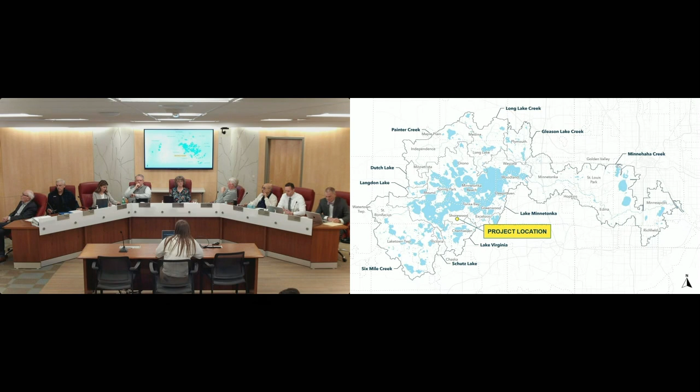The applicant is proposing the project in the city of Shorewood, located in the Lake Minnetonka subwatershed, as shown here in yellow.

Zooming in further, you can see the project location, again shown in yellow, drains northwest via Pebble Creek into a wetland complex before ultimately draining into Lake Minnetonka.

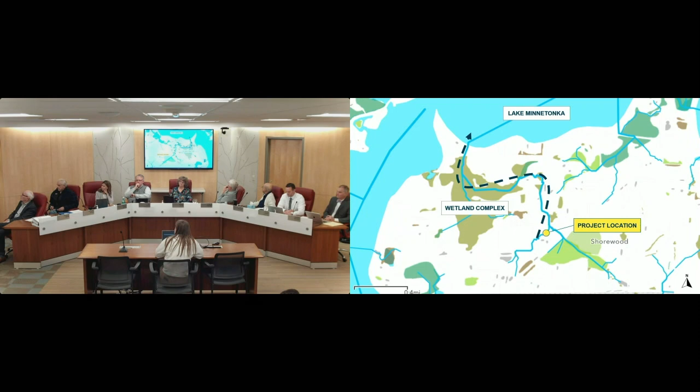The site is shown here, outlined in orange, with Pebble Creek shown in blue. The site has 1 existing home, and the city of Shorewood approved a 2-lot split for the site in October of 2024, so the site is now divided into 2 parcels, as shown here. The proposed work is occurring on the highlighted orange parcel.

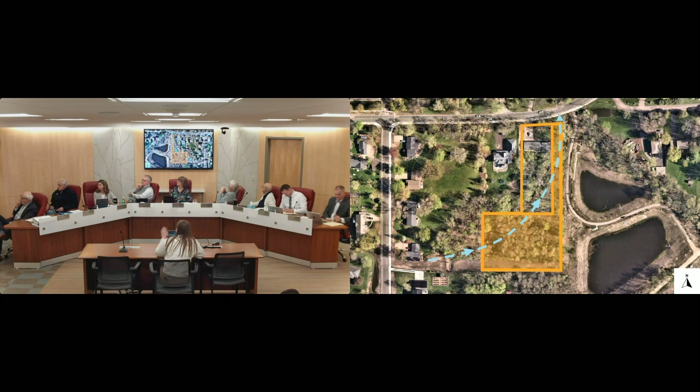The current project proposed is the installation of a driveway and utilities such as water, sanitary sewer, phone, cable, gas, and electric lines. These are proposed to service a future single-family home that is not proposed at this time and will be subject to future permitting.

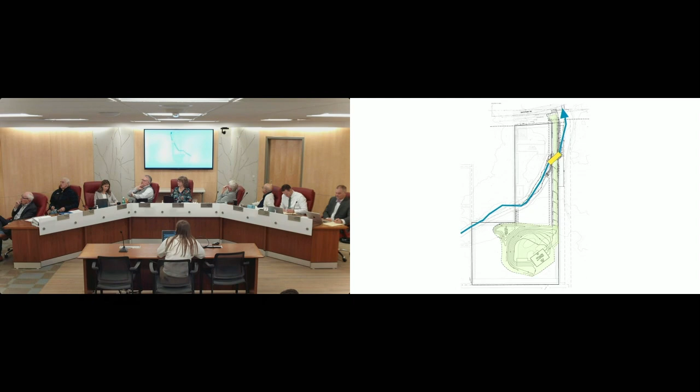In order to construct the driveway crossing, a series of culverts are proposed at the point where the driveway crosses Pebble Creek. Even though the future home isn't proposed at this time, grading is proposed in the area to prepare the site for the future build.

Because this is a 1 to 2 lot subdivision and the proposed impervious surface amount for the driveway and future single-family home is under 1 acre of new and reconstructed impervious surface, the stormwater management rule is not applicable. That being said, the applicant is proposing a filtration basin to conform to the city's stormwater regulations, which will be constructed at the time of the future house.

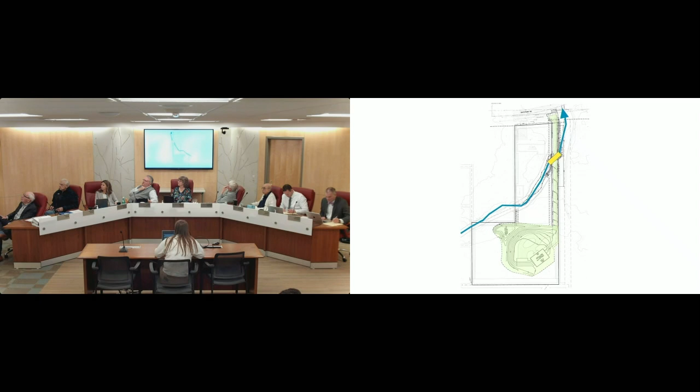I'll now pivot to the analysis for how the proposed project meets district rule requirements.

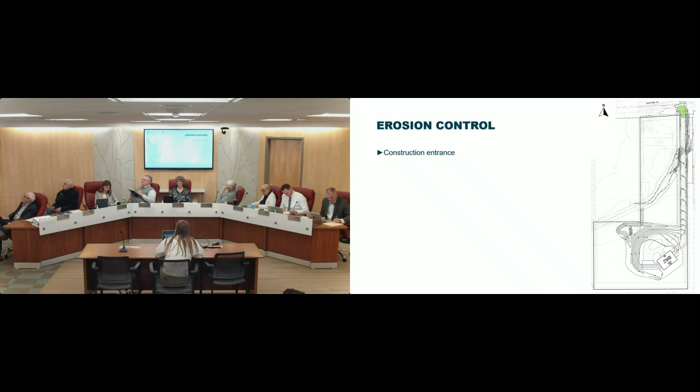Because the project disturbs more than 5,000 square feet of land and will be moving more than 50 cubic yards of soil, the erosion control rule is triggered. The applicant's erosion control plan proposes a construction entrance at the north side of the site, outlined here in green, with perimeter control around the entire site and between the proposed grading and the creek. The applicant also proposes a temporary ditch check downstream of the proposed culvert to reduce sedimentation downstream. Staff have reviewed the applicant's erosion control plan and found it compliant with all rule requirements.

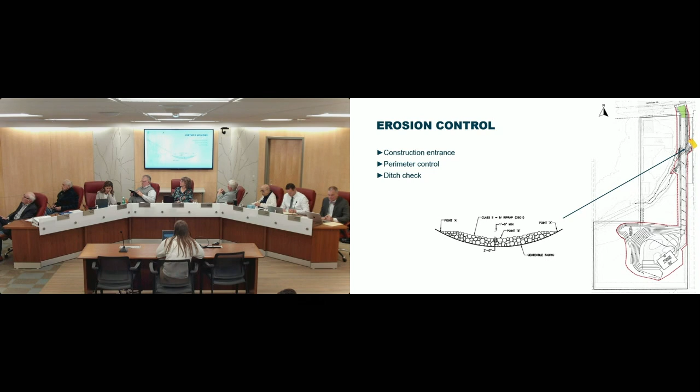This project triggers the water body crossings and structure rule for 2 parts of the project. The first is the proposed culverts associated with the driveway crossing, and also the subsurface crossing of the creek for the utility lines. The rule states that the use of the bed or bank of a water body must meet a demonstrated specific need. In this case, the demonstrated need is to provide vehicular and utility access to the proposed house.

I'll first go over the analysis for the proposed culverts and then the utility crossing. The rule requires that hydraulic capacity be maintained, and for watercourses specifically, there may be no increase in upstream or downstream flood stage. The district engineer has reviewed the applicant's modeling for the proposed culverts and found that there's no increase in flood stage, therefore meeting this section of the rule.

The project is also required to maintain navigational capacity. As shown earlier, Pebble Creek is an intermittent stream with low flows that are not capable of navigation in neither the existing nor the proposed conditions.

The project must also preserve aquatic and upland wildlife passage. The proposed culverts are 2 feet wide, and their size and elevation maintain passage of wildlife within the creek. The proposed driveway will also not prohibit passage of deer or any other wildlife that would cross in the area.

The flows passing through the creek are relatively low, but the applicant also proposes riprap at the outfall of the culverts to prevent erosion or scour. The rule requires that the proposal be the minimal impact solution to the project's need. The applicant has also provided 4 alternatives demonstrating that their proposal is the minimal impact solution.

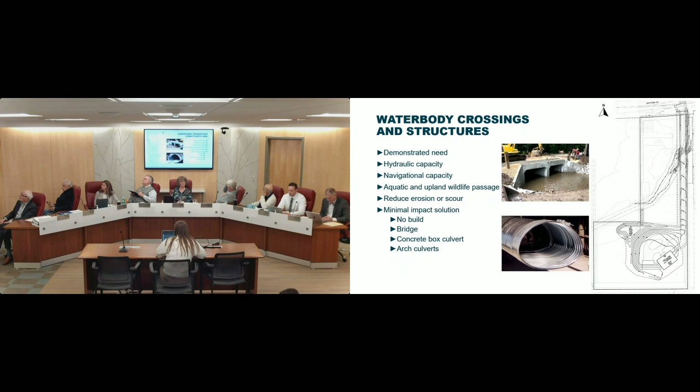However, some other alternatives that were considered were larger crossings like a bridge, box culvert, or larger arch pipes, but those have more inherent impact being larger crossings and affect other factors like constructability.

Now pivoting to the analysis of the proposed utility lines, the proposed lines cross below Pebble Creek and therefore were analyzed using the subsurface crossing criteria. This criteria requires that the crossings have a minimum clearance of 3 feet below the bed of the water body and that entry and exit boreholes be placed at least 100 feet away from the water body bank. The water and sanitary sewer is proposed to be constructed with the driveway installation and meet this criteria.

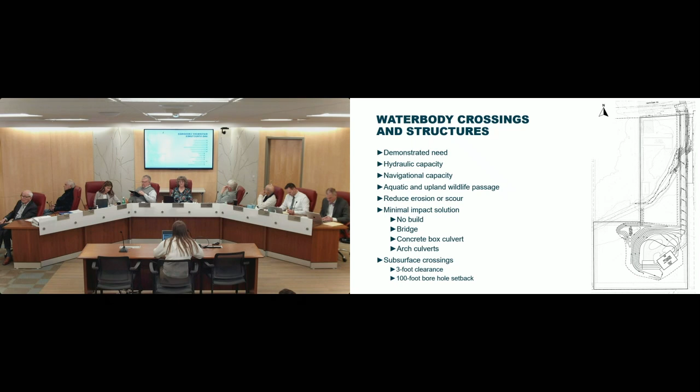The additional utilities will be installed at the same time as the future home construction so that they can tie into the service site. Therefore, it's recommended that a condition of the permit be to provide updated crossing plans if plans do change due to final home layout.

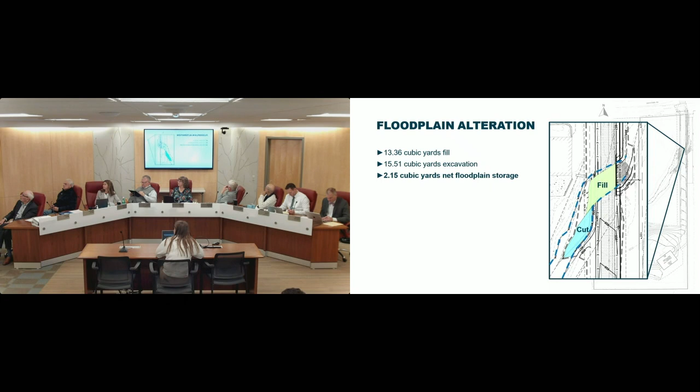The installation of the culverts requires fill within the floodplain of Pebble Creek, and therefore the floodplain alteration rule is applicable. The project proposes 13.36 cubic yards of floodplain fill and 15.51 cubic yards of excavation to offset the proposed fill. This results in 2.15 cubic yards of net floodplain storage created, therefore meeting the rule.

Now that we've gone over the district's rule analysis that are triggered for this proposal, I'll discuss the comments and concerns that were received during the permit's public notice period by 2 nearby property owners. After receiving the comments, district staff met with one of the property owners and Shorewood city engineer to meet on site to discuss the concerns in a bit more detail.

Nearby property owners expressed concern that district policies are to protect wetlands. However, this project isn't being reviewed for wetland impacts. As mentioned earlier, the site drains to a wetland complex before eventually draining to Lake Minnetonka. However, there are no delineated wetlands identified on site, and therefore the wetland protection rule is not applicable. That being said, staff has reviewed the project under the erosion control rule to make sure that best management practices are in place to minimize sedimentation off-site and into downstream water bodies.

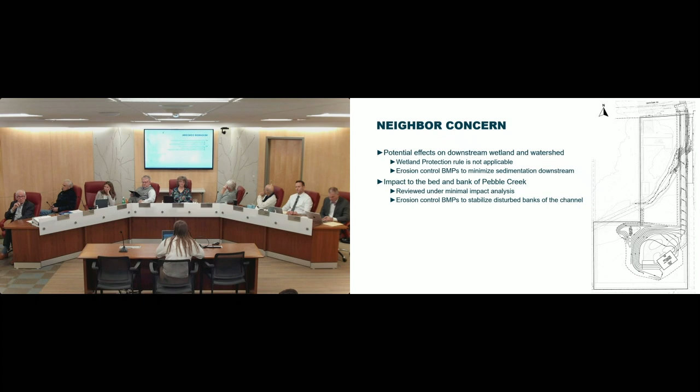Concern was also raised in regard to the impact that the project will have on the bed and bank of Pebble Creek. The installation of the culverts results in some inherent level of disturbance, but the project has been reviewed under the minimal impact analysis for the water body crossings and structures rule. Prohibiting the crossing would mean prohibiting access to the buildable portion of the parcel. The applicant also proposes a temporary ditch check to minimize sedimentation and erosion control blankets and seed mix on the disturbed banks of the channel.

There was also concern raised regarding the impact that the construction will have on wildlife habitat. And while the general project and construction is not regulated by the district on the impact it will have on wildlife, the impact that the proposed crossing will have on wildlife passage was reviewed under the water body crossings and structures rule.

Concerns regarding tree removal were also raised. While the district does not regulate tree removal, the city of Shorewood has a tree ordinance with a replacement requirement that staff understands will be implemented as a part of the city building permit process.

A concern was also raised regarding the proposed grading and increased impervious surface and that it should be regulated. As mentioned earlier, because the new and reconstructed impervious surface for the driveway and future home is less than 1 acre of new and reconstructed impervious surface, and also part of a single-family residential development, it's exempt from the stormwater management rule. However, the applicant is proposing a filtration basin to capture and treat the runoff from the home in accordance with city stormwater regulations.

A central concern of nearby property owners was that the proposed driveway and future home may increase groundwater levels. They have requested that a requirement of the permit be for the applicant to conduct a hydrologic assessment looking at the project's potential impact to groundwater in greater detail.

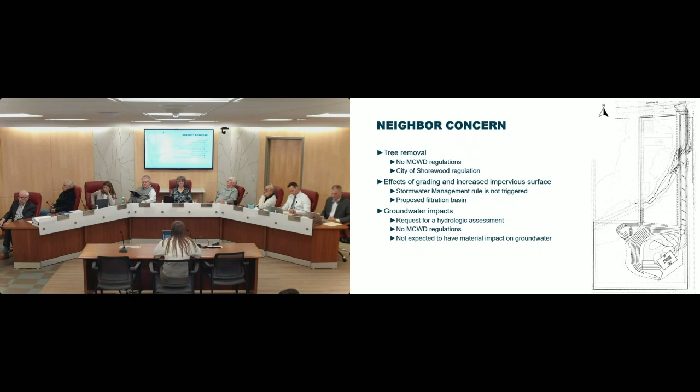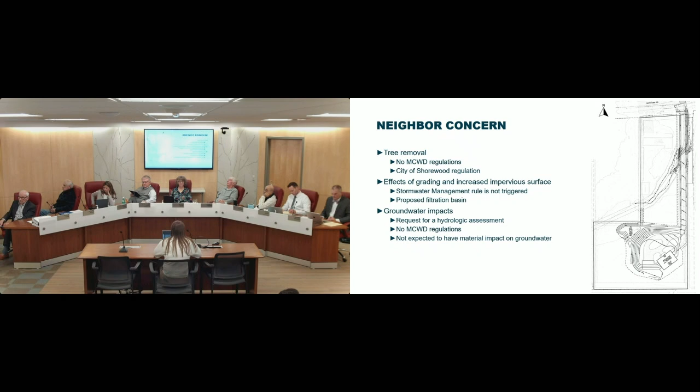Manager Loftus? Just a quick question. The ponds that are just on the other side, are those the ones you can see from the trail? Yes. Yeah, okay. Would there be setbacks? That's not a wetland though, so would there be setbacks from a pond? Yes, thank you, Manager Loftus. That's a good question. All of the wetland impacts and setbacks for the Smithtown Ponds project were regulated as a part of that permit. And for wetland buffers in general, if there is a wetland that's off of the property, the owner is not required to put a buffer around a different

I just wanted to note, we're test driving new AV systems, so we're working out the kinks, appreciating everybody's patience. So if we do have that freeze up again, I think Maggie will just continue the presentation. All right, so it's Murphy's Law, we test drove it 5 times today, didn't have any issues. But now it's prime time. There's a gremlin maybe, huh?

Okay, thank you. Does that help? Okay. Okay. Thank you for bringing it to our attention.

Ms. Mendon. All right. Good evening, President White and managers. I'm presenting permit 25-056 for a single-family home located at 9501 Lakewood Circle. The permit is before the board due to public request from a concerned neighbor. I believe members of the public are in attendance tonight and may wish to address the board.

This permit application is also requesting an exception from our stormwater rule by proposing to get credit for treating 5.87 acres of ag land on the property. Staff and the district engineer are recommending that the board approve this permit and the associated exception. Quick outline, I'll start with a project overview before walking through the district's rule analysis. Then I'll go over the exception request and end with an overview of the concerns.

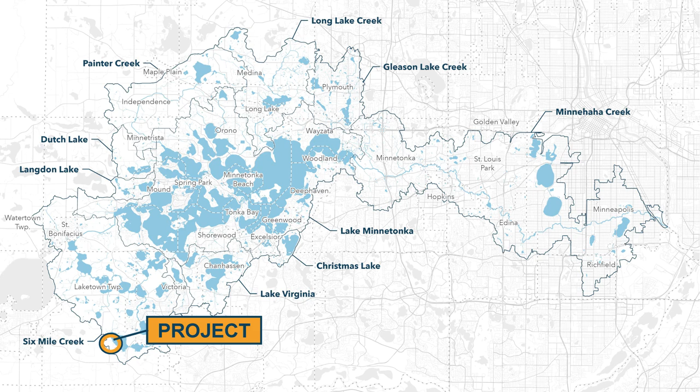9501 Lakewood Circle is located within the 6 Mile Creek Halsted Bay subwatershed and is in Laketown Township. The 61-acre parcel shown in yellow is on the west side of Pierson Lake and falls right on the district's boundary. The site has historically been used for agriculture, and the proposed use will incorporate both agriculture and a residential dwelling.

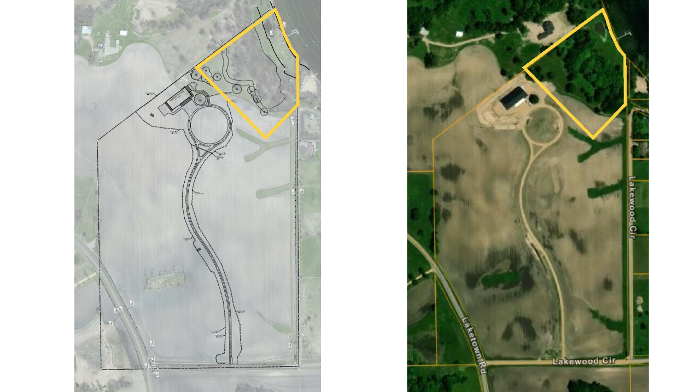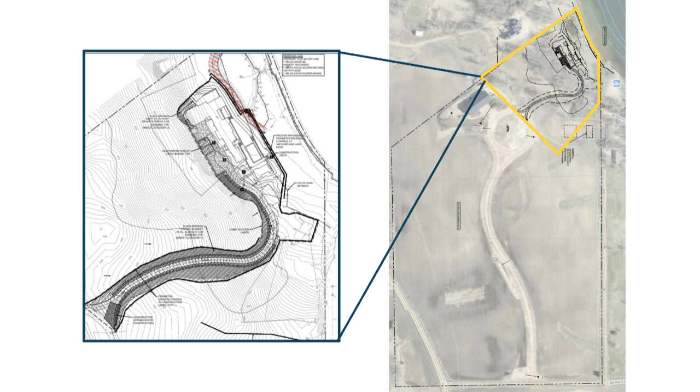In 2023, the applicant applied for a district permit for the construction of a driveway and pole barn, which you see on the screen. This project was reviewed and approved and recently finished construction. The permit we have in front of us tonight is for the construction of a single-family home in the area shown in yellow. The project will involve the construction of a new residential structure and associated driveway, which will result in an additional 0.52 acres of hard cover.

The project proposes to disturb just under 80,000 square feet and excavate over 5,000 cubic yards, so the erosion control rule is applicable. To meet the requirements, the applicant is proposing a construction entrance and perimeter control with a double row of silt fence between the proposed work and the wetland edge. Additional erosion practices are noted in the applicant's SWPPP.

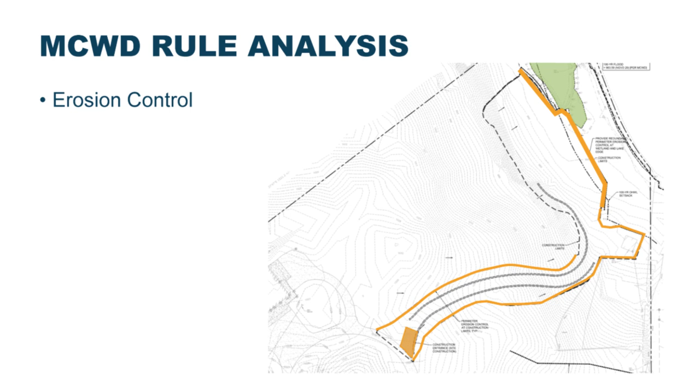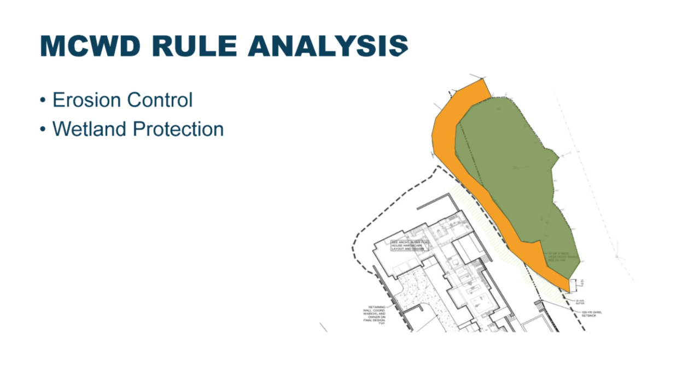On site, there's a managed 2 wetland. The house is proposed upgradient of this wetland and therefore requires a buffer. To meet this rule, the applicant has provided plans that show a 25-foot buffer using buffer averaging, and the buffer is shown in orange.

The picture on the left is looking back on the property from the shoreline and shows the existing conditions and vegetation. The applicant is not proposing to grade or otherwise disturb the existing vegetation within the buffer area, aside from a 10 by 3 foot vegetated swale, which will be stabilized and vegetated in accordance with PCA guidance. This buffer area meets the requirements of this rule and will be recorded under a maintenance declaration.

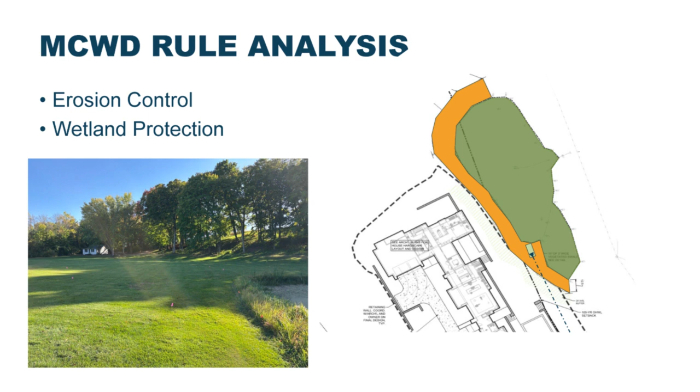All work on this site is considered a common plan of development under our stormwater management rule, which means that we review for the total amount of hard cover on site, not just for the proposed house. So for both projects, the aggregate hard surface is 2.27 acres, which requires volume and rate control. Our rule requires that water quality standards be met by providing volume control.

For volume control, the development in total is required to provide 8,266 cubic feet of volume control for those 2.27 acres of new impervious surface. As part of phase 1 of this project, 4 basins were constructed, and those basins provide 13,323 cubic feet of volume control.

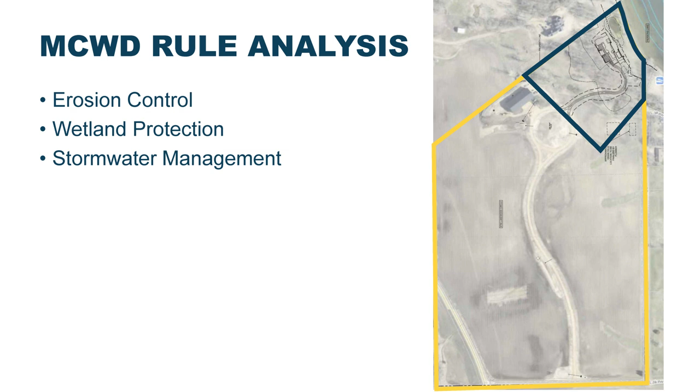For the house, it's been demonstrated that due to high groundwater and poor soils, a basin that captures and infiltrates the house runoff is technically infeasible. The applicant is requesting to utilize the existing basins, which are oversized and treat a greater area, to meet the water quality requirements, which brings us to the exception request.

Under strict compliance, the applicant would provide 1,901 cubic feet of volume control to capture and treat runoff from the 0.52 acres of new impervious surface from the house. The amount of phosphorus removal provided by this volume control would be 1.68 pounds per year.

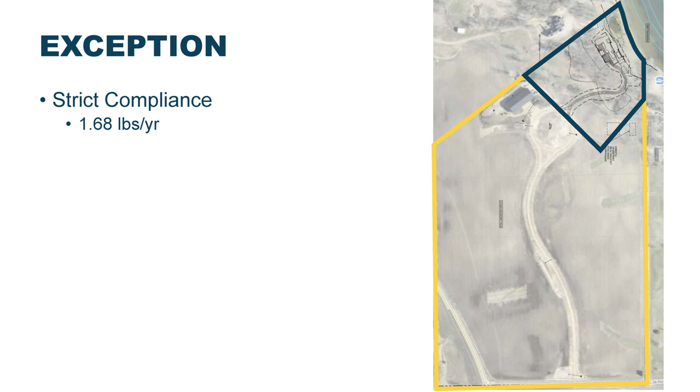The applicant is requesting that the board consider the existing basins, which are oversized, treat a larger area, and capture ag land to meet water quality requirements for the site. 3 of the 4 basins capture 14.1 pounds of phosphorus that would otherwise flow into Pearsons Lake.

The 4th basin captures 7.8 pounds of total phosphorus per year that would otherwise drain to a low point on the parcel. So in total, the proposal removes more than 10 times the required amount of phosphorus within the 6 Mile Creek subwatershed, which leads staff and the district engineer to recommend approval of the proposed exception.

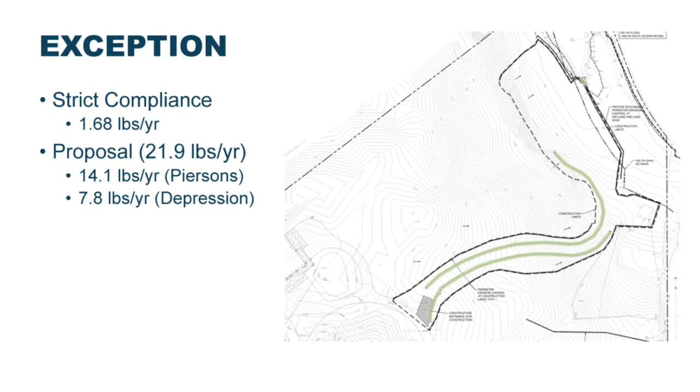Transitioning to the neighbors' concerns, during the permit public notice period, the district received inquiries from a neighbor, Mr. Klingelhutz, who is the president of the Piersons Lake Association. As we commonly do when there's public interest in a permit, staff engaged with the neighbor and exchanged multiple emails and phone calls over the past few weeks.

In the next few slides, I'll go over the concerns and the district's conclusions. I'll note that the applicant, Mr. Young, offered to have a meeting to discuss any of these concerns and relayed that to the concerned neighbors, but it was not something that was pursued.

The question was asked, does the district routinely allow construction limits right up to the open water within wetland buffer areas on large properties? The answer is yes. The district regulates impacts to wetlands themselves and requires buffer areas to be vegetated. This allows for buffer disturbance as long as it's revegetated.

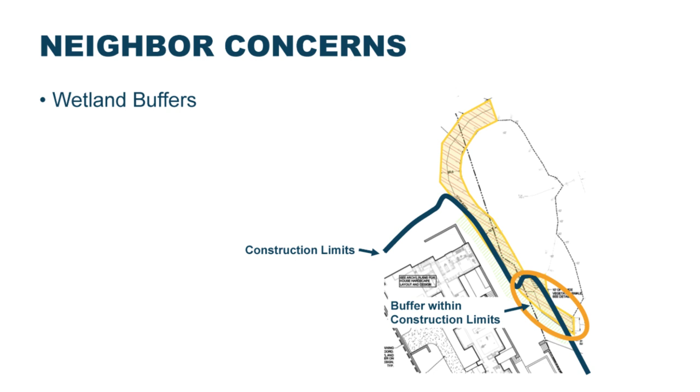In this case, the construction limits go into the wetland buffer because they're constructing a vegetated swale between a pipe outlet and the wetland, which will reduce sediment load into the wetland. The area will be fully established per PCA guidance and will not impact the overall function of the wetland.

A concern was also raised regarding the project being split into different phases. As I covered, the district reviewed this as a common plan of development, meaning that we looked at all of the work on site to determine the scope of stormwater management.

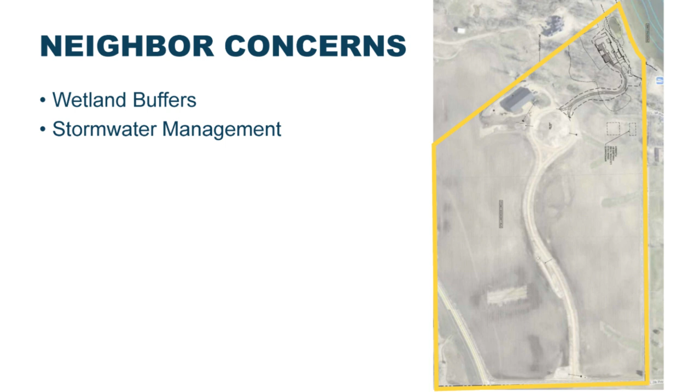Other concerns were raised, but ultimately fall outside of the district's regulatory scope. At a high level, those concerns were centered around tree preservation, which the district does not regulate, invasive species review, which is not a requirement for this project, indigenous burial mounds, which was reviewed by Carver County back in 2023 and was found to not be a concern. And then lakeshore setbacks, which the district does not review for, but Carver County does. From speaking with their staff, we understand that these setbacks are being met.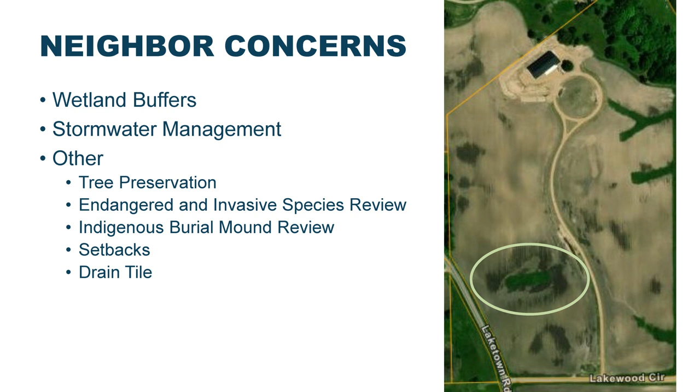So staff have no reason to believe that there was any violation of the Wetland Conservation Act or that there were changes to drainage patterns. Also, this concern is not directly applicable to the permit for the single-family home.

Bringing it back to the permit in front of us tonight, staff have reviewed and confirmed that the project is compliant with the district's erosion and wetland protection rules. The applicant is requesting an exception from the stormwater rule, which would result in over 10 times greater removal of total phosphorus per year. Staff and the district engineer recommend that the board approve the permit and associated exception.

Before turning it back to the board, I'll note that the applicant, Mr. Young, is here tonight and is willing to answer any questions you may have. Members of the public may also wish to address the board.

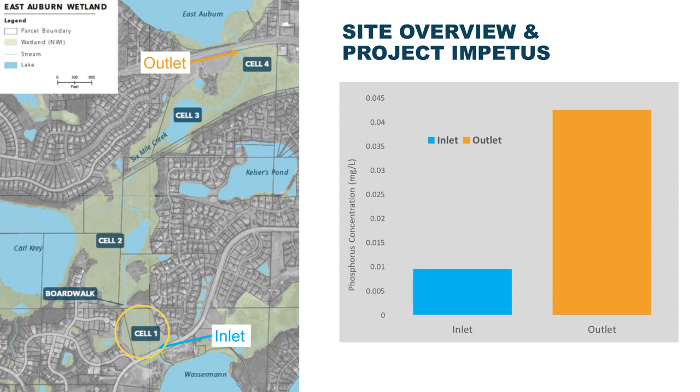Having understood this potential for reduction and restoration, district staff worked to identify if loading was coming from a particular cell or equally across the wetland. Data indicated that cell 1 was responsible for the majority of the phosphorus export, likely attributed to legacy nutrients delivered from upstream Wasserman Lake. Cell 1 is now the site of the current project.

A feasibility study, constructed in 2023, identified hydrologic restoration of the wetland through installation of an outlet control structure, or sheet pile weir, as the most cost-effective and feasible opportunity to reduce nutrient export. In addition to the weir, the City of Victoria has asked MCWD to advance design for a new boardwalk to replace the existing failing boardwalk that crosses the wetland near the proposed site of the weir. I'll briefly review the weir and its updates from 60% design.

So when I was in front of you at the end of February, we had 60% design plan sheets. This shows that the weir had a single level height across the length of the weir at an elevation of 943.9, spanning across the entire wetland channel. The 2, 10, and 100-year events all flow over the entire width of the weir.

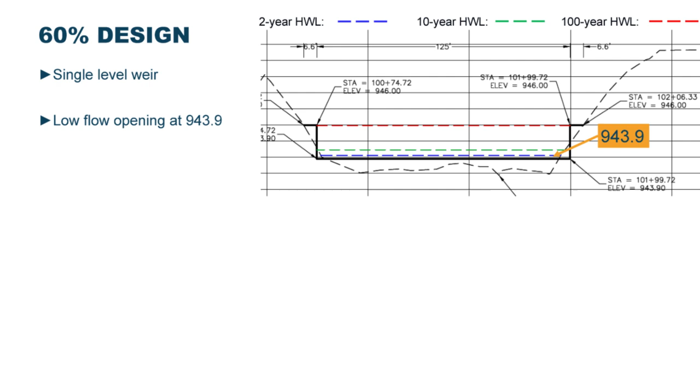Additional modeling since then has revealed that we were able to add back in a notch to the weir, which allows us to hold back more water behind it, improving potential nutrient reduction estimates. The low flow opening remains at 943.9, the elevation of the ordinary high water line. The rest of the weir will be at 946 elevation, about 2 feet higher than the low flow opening. This is all while still making sure that there are no water level impacts to the surrounding lakes, Wasserman, Carl Krey, and East Auburn Lake.

I also want to point out that these images have an exaggerated vertical scale, so imagine this stretched a lot more horizontally. You'll see it's much less protruding from the wetland than as this is portrayed.

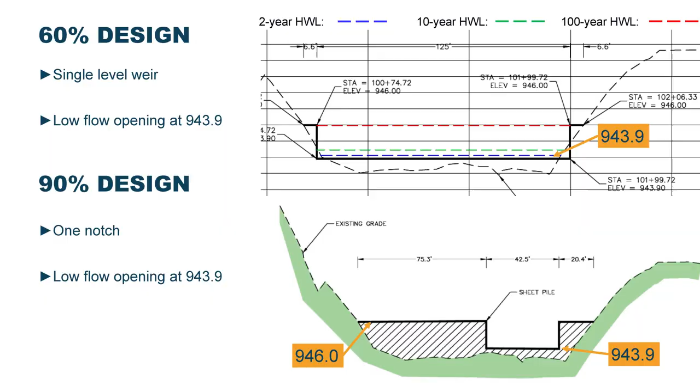Once the weir is placed, a permanent pool of about 6 to 12 inches will inundate the wetland during normal years. The pool will stay within the Cell 1 wetland boundary, which is entirely on land owned by the City of Victoria. It's important to note that the permanent pool doesn't exactly mean we'll see all of this open water. It's very shallow, and the emergent wetland vegetation in this wetland will be taller and will continue to persist even with this permanent pool.

By maintaining saturated conditions in Cell 1, we hope to reduce the nutrient export out of the cell by preventing any leaching of phosphorus-rich groundwater and mobilization of phosphorus during rain events. This work will also restore the degraded wetland by re-engineering the hydrology to replicate its natural wetland function before it was ditched.

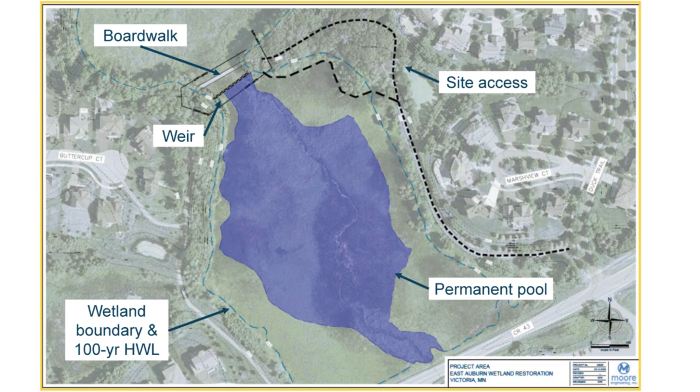Moving on to the boardwalk, there's no change between 60% and 90% design. The boardwalk will be 8 feet wide with a toe curb on the edge for safety. The lowest point of the boardwalk is 948 feet, 2 feet higher than the highest point of the weir. The boardwalk will be able to accommodate city snow removal equipment and meets MnDOT and ADA standards, which means no gradient change higher than 4%.

City and nearby residents support the refurbishment of this boardwalk.

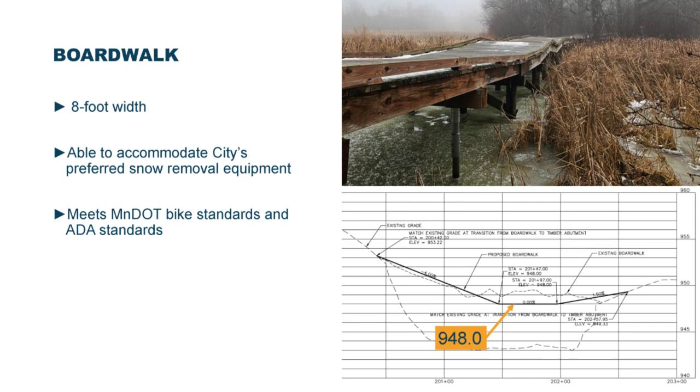Speaking of residents, we hosted a public meeting at Victoria City Hall on Tuesday, March 25th. 15 residents attended, along with 3 of our board managers, and the city engineer, Kara Guerin, was also present. The open house style meeting provided information on the restoration project and gathered feedback from interested residents. There was overall project support and a level of excitement for both the trail improvements and improvements to the water quality.

Another mandatory project element is permitting. We've applied for the applicable permits with DNR and the Army Corps, and we have already received word that we've obtained the Army Corps permit. And I'll now hand it over to Maggie, who will introduce the district permit for this project. Thank you.

All right, so item 10.3 is for the East Auburn Wetland District permit. This project triggers the district's floodplain alteration, water body crossings and structures, and wetland protection rules. Staff and the district engineer have reviewed the proposal and confirmed that it meets these requirements. I'll briefly run through each rule before recommending approval of this permit.

Floodplain alteration is triggered due to portions of the weir and boardwalk being within the wetland's floodplain. The removal of the existing boardwalk timbers provides approximately 0.56 cubic yards of floodplain storage. The proposed weir and new piers will occupy about 0.37 cubic yards, resulting in a net gain of 0.19 cubic yards. This meets the requirement of no net loss of flood storage.

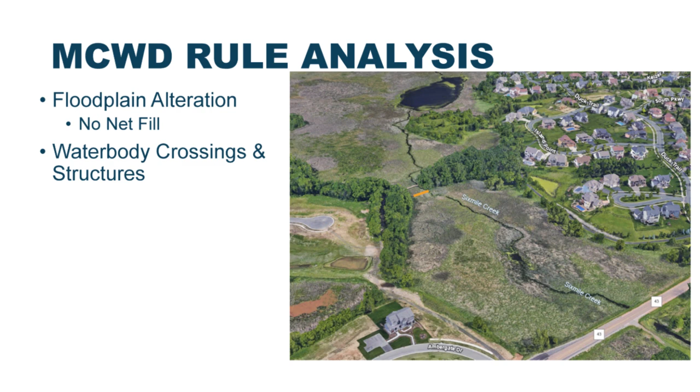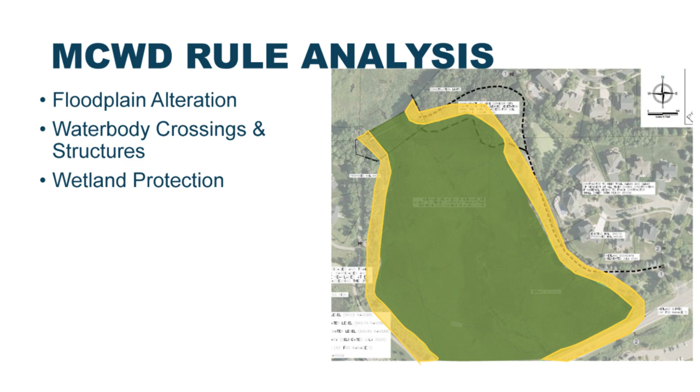Due to the last rule being triggered, a wetland buffer is required here. Those who have been on site know the city's property around the wetland is already densely vegetated, aside from a trail running along both sides. The project meets these requirements, as the required buffer area is already well established to the greatest extent feasible within the city's property. Staff and the district engineer have reviewed the proposal and recommend that the board approve.

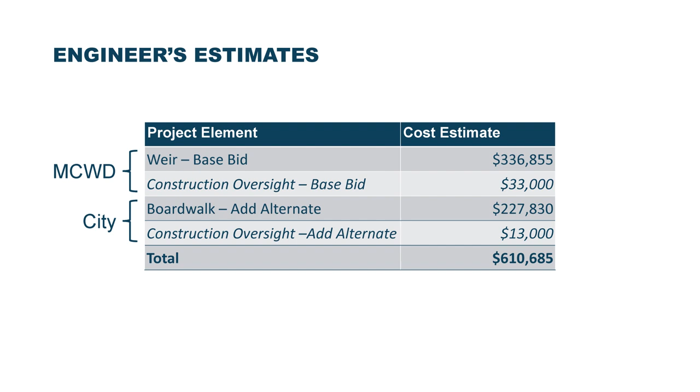The engineer's opinion of probable cost estimate is in the table, broken up by project element, which lines up with payer responsibility. The district is paying for the weir, with a cost estimate of about $336,855, which sits right in the middle of the feasibility range of $240,000 to $390,000. The boardwalk, which we'll set up as a bid alternate, is funded by the city, with a cost estimate of $227,830. In total, $610,685, along with construction oversight.

In your packet is the term sheet outlining the elements that will be further refined into a final agreement with the City of Victoria, for the Board of Managers to consider and approve. The agreement covers all aspects for partners to advance the project, but there are three main components I will walk you through. The first is access.

The agreement will establish the district's right of access by means of an easement, which will accommodate access and staging for construction as well as operation and maintenance. Second is maintenance: the agreement will specify that the city will own and maintain the boardwalk, and the district will own and maintain the weir.

The O&M manual, which you can find in the board packet, goes into further detail on how and how often each element will be inspected and maintained. The third component of the agreement will be the repayment structure. The district will fund construction of the boardwalk refurbishment up front, and then the city will engage in a repayment plan where 20% of the cost will be due upon final invoice of construction, and then equal annual payments thereafter for the next 4 years.

If there are no major changes to these terms, and if there are no reservations from you regarding the terms of the agreement, then once the city signs and approves the agreement, we will plan to add it as a consent item at a future board meeting, likely in May or June. But if there are any substantive changes to the terms, I'll bring it back before the board to discuss and approve.

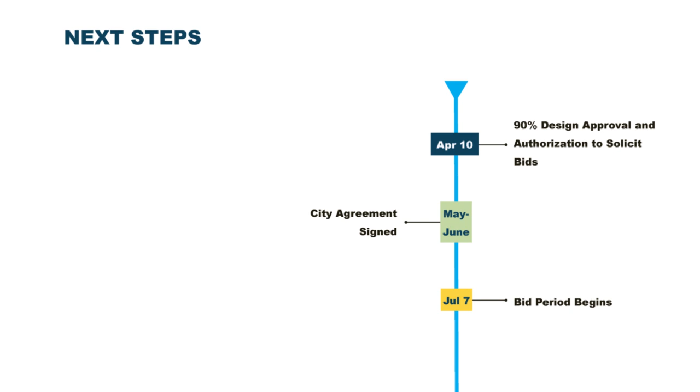Substantial completion of the construction, which includes everything except final seeding, shrub planting, and trail patching, will be completed by February 27th, 2026. And with that, staff is presenting Resolution 25-024 to the board, which seeks approval of the 90% design plans for the East Auburn Wetland Restoration Project and authorization to solicit bids.

Thank you. Is there a motion to adopt the resolution? I'll move that we adopt Resolution 25-024. Thank you, Manager Olson. Is there a second? Manager Hejmadi seconds. Any questions or discussion?

Manager Olson? Just a quick comment on all of these issues out where Carver County is. I really appreciate the work you folks have put into it. Sometimes it can be a tough decision, and you, again, keep finding a way to make everything happen. So I deeply appreciate the work. Thank you. And even though I'm from Hennepin County, I appreciate the work you're doing in Carver County, too.

Manager Maxwell and I were having a side conversation about how those toe boards, or whatever you call them on the side, toe rail, is a safety improvement over the existing boardwalk, which is a good thing. Anything else?